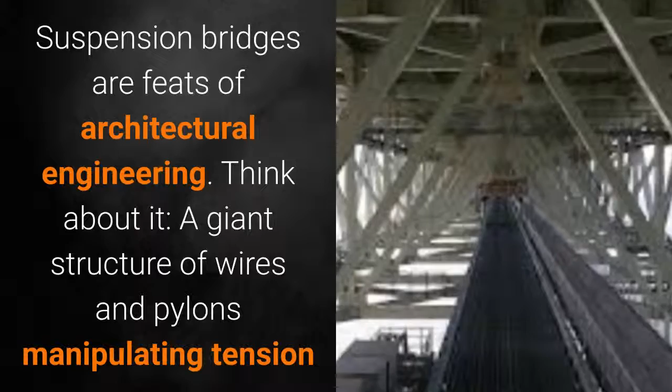Suspension bridges are feats of architectural engineering. Think about it, a giant structure of wires and pylons manipulating tension and compression to allow for a single span of heavy material to be suspended in air, thus letting it bridge wide chasms and bodies of water.

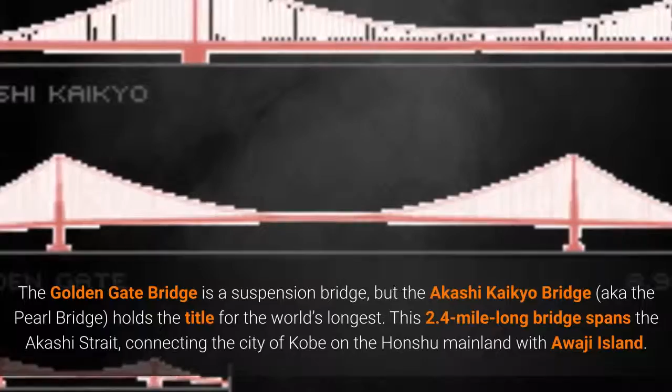The Golden Gate Bridge is a suspension bridge, but the Akashi Kaikyo Bridge, aka the Pearl Bridge, holds the title for the world's longest. This 2.4-mile-long bridge spans the Akashi Strait, connecting the city of Kobe on the Honshu mainland with Awaji Island. Since 1998, the bridge has carried 6 lanes of traffic and approximately 23,000 cars a day between the two towns. The impressive central span ranks as the longest in the world at 1.24 miles long, and the bridge itself is built to withstand a magnitude 8.5 earthquake.

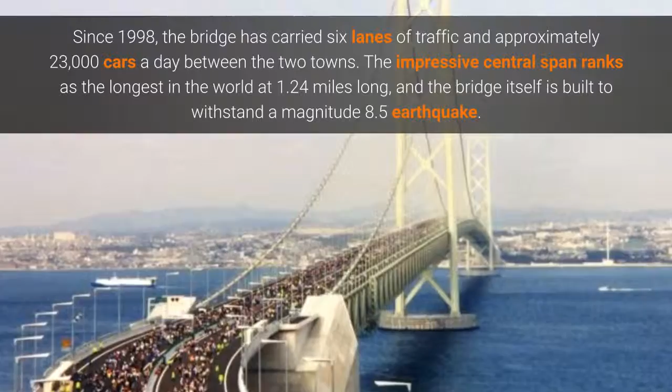In fact, during construction, the 1995 Kobe earthquake actually forced the two central towers further apart, making the center span 3 feet longer than it was originally designed.

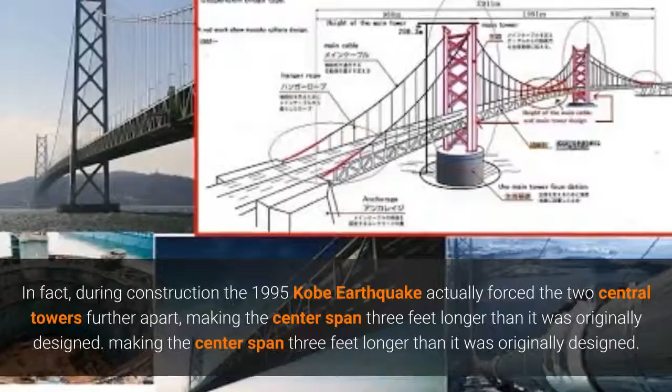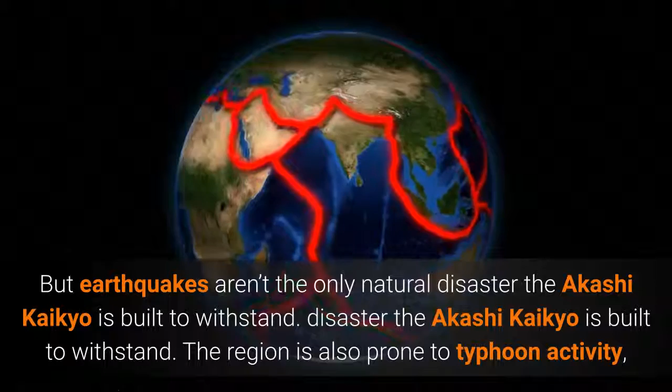But earthquakes aren't the only natural disaster the Akashi Kaikyo is built to withstand. The region is also prone to typhoon activity, so designers also built it to withstand 180 mph winds too.

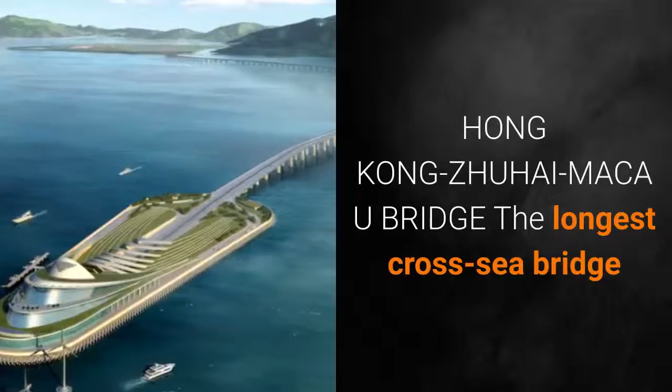Hong Kong-Zhuhai-Macau Bridge, the longest cross-sea bridge. China long ago cemented itself as one of the leading countries when it comes to bridge building, and the Hong Kong-Zhuhai-Macau Bridge only further cements the country's reputation.

At 34 miles in length, it is the longest cross-sea bridge in the world, twice as long as the country's Jiaozhou Bay Bridge, the former longest bridge in the world.

The Hong Kong-Zhuhai-Macau Bridge has completely changed transportation between the cities. The former inland route between Hong Kong and Macau is a 4-hour trek. On the bridge, travel time may be as little as 30 minutes.

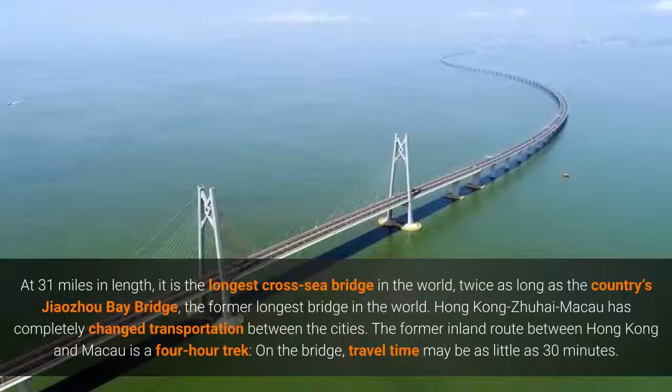Chinese officials hope that the bridge spurs economic development in southern China, one of the country's poorest areas. At the same time, it strengthens Hong Kong's position as the economic heart of the region.

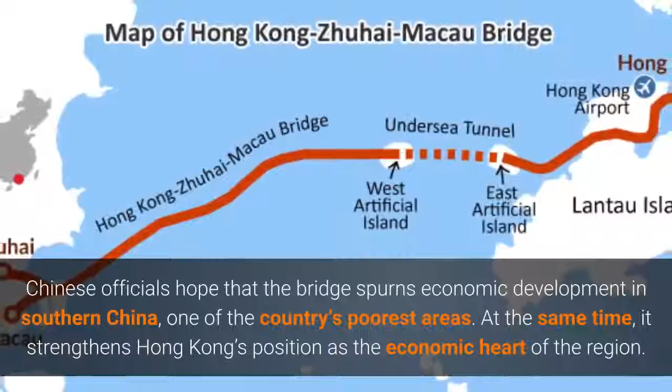While the bridge is the longest cross-sea bridge, it actually consists of 2 sections and 3 artificial islands. Connecting the 2 sections is a 1.7-mile tunnel closer to the Hong Kong side, which gives enough space for large shipping vessels to pass through.

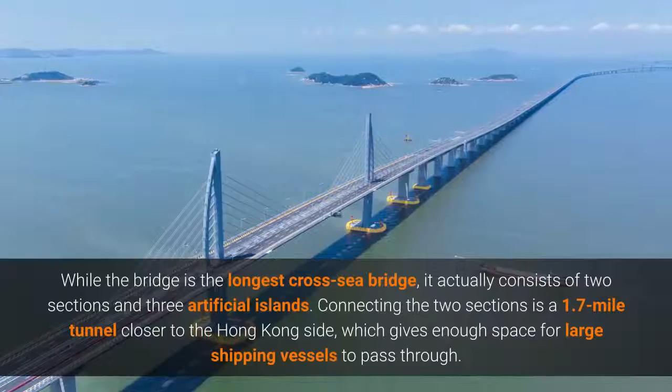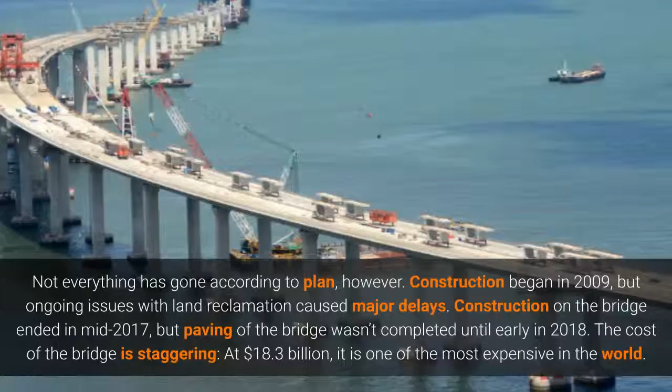Not everything has gone according to plan, however. Construction began in 2009, but ongoing issues with land reclamation caused major delays. Construction on the bridge ended in mid-2017, but paving of the bridge wasn't completed until early in 2018. The cost of the bridge is staggering, at $18.3 billion, it is one of the most expensive in the world.

Lake Pontchartrain Causeway, the longest continuous bridge over water. The Hong Kong-Zhuhai-Macau Bridge currently has the longest bridge span of any of the bridges on our list in the world in aggregate at 30.1 miles, but the longest continuous span over water is the Lake Pontchartrain Causeway in Louisiana.

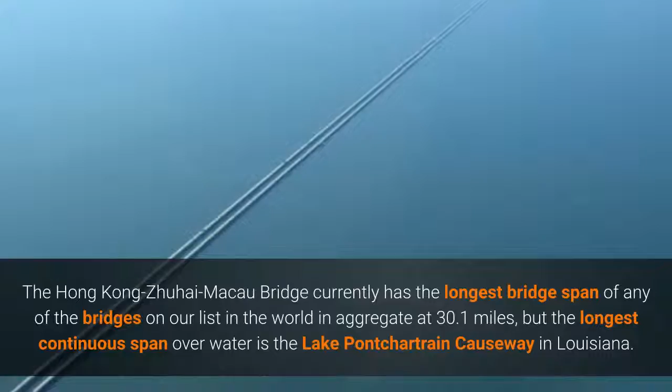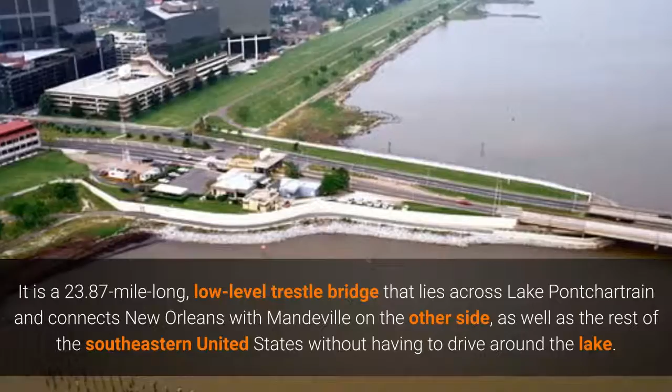It is a 23.87-mile-long, low-level trestle bridge that lies across Lake Pontchartrain and connects New Orleans with Mandeville on the other side, as well as the rest of the southeastern United States without having to drive around the lake.

Following the completion of construction, communities on the north shore of Lake Pontchartrain saw financial benefits as they were now included in the New Orleans metropolitan area. Drive times were reduced by nearly an hour. With a speed limit of 65 mph, you can be across the bridge in about 20 minutes or so.

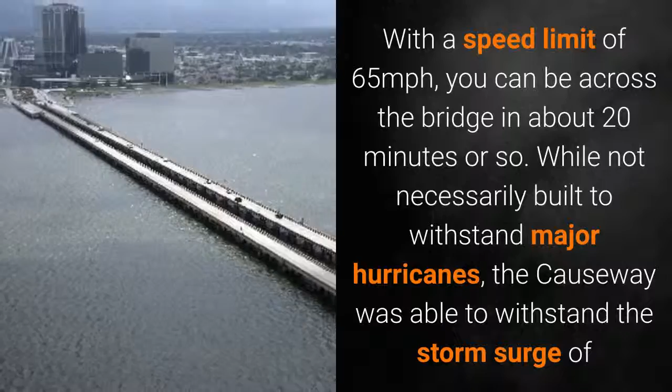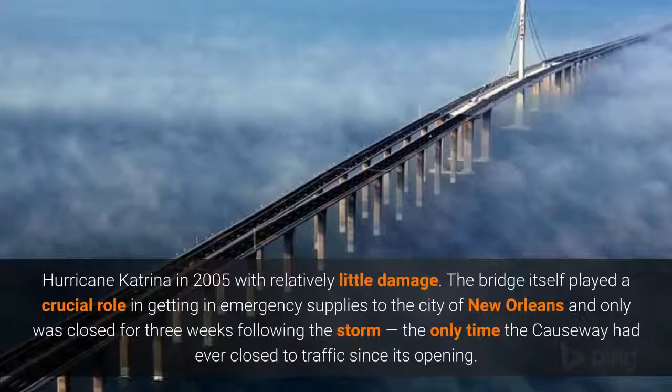While not necessarily built to withstand major hurricanes, the causeway was able to withstand the storm surge of Hurricane Katrina in 2005 with relatively little damage. The bridge itself played a crucial role in getting emergency supplies to the city of New Orleans and was only closed for 3 weeks following the storm, the only time the causeway had ever closed to traffic since its opening.

MILLAU Viaduct, the tallest bridge. We've given a lot of attention to bridges with impressive lengths, but that isn't the only measure that makes a bridge noteworthy. The tallest bridge in the world, meaning the height of the structure's tallest point, is the MILLAU Viaduct.

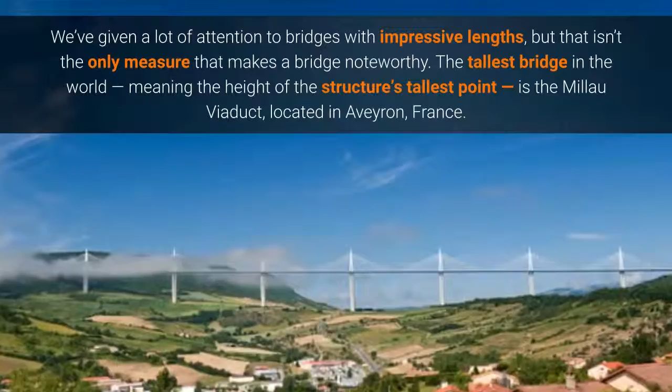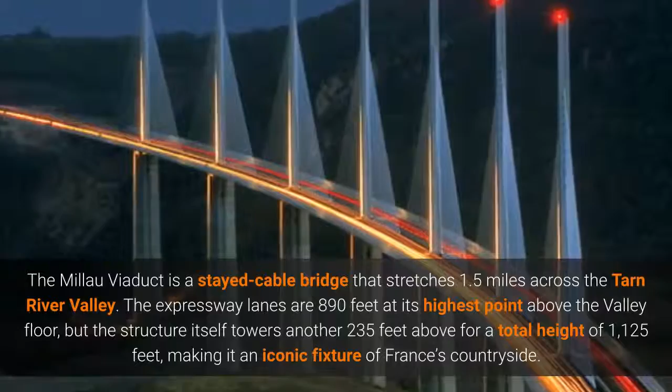Located in Aveyron, France, the MILLAU Viaduct is a stayed cable bridge that stretches 1.5 miles across the Tarn River Valley. The expressway lanes are 890 feet at its highest point above the valley floor, but the structure itself towers another 235 feet above, for a total height of 1,125 feet, making it an iconic fixture of France's countryside.

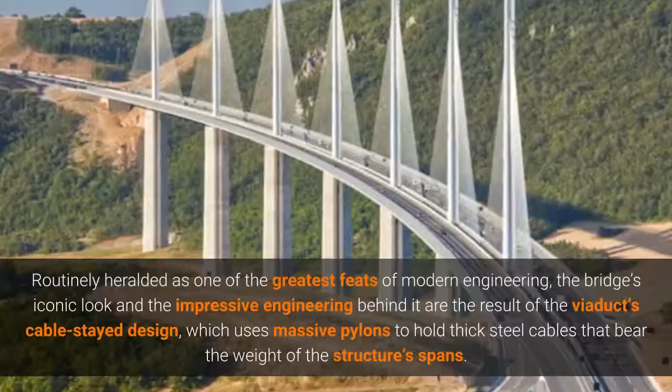Routinely heralded as one of the greatest feats of modern engineering, the bridge's iconic look and impressive engineering are the result of its cable-stayed design, which uses massive pylons to hold thick steel cables that bear the weight of the structure's spans.

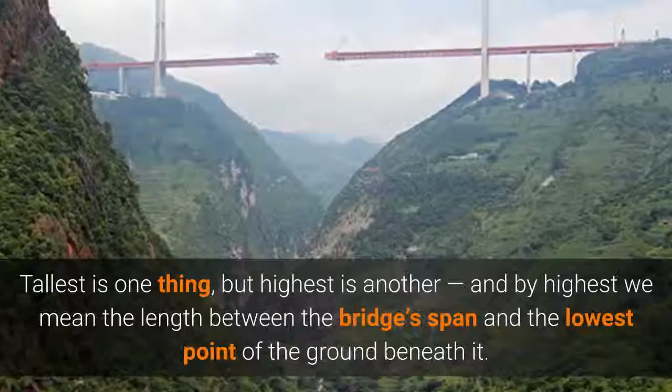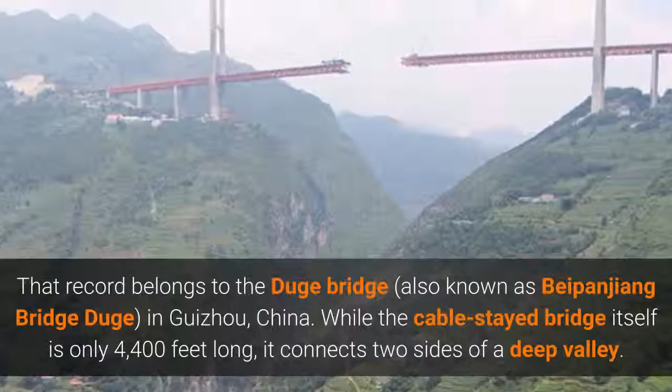DUGE Bridge, the highest bridge. Tallest is one thing, but highest is another, and by highest we mean the length between the bridge's span and the lowest point of the ground beneath it. That record belongs to the DUGE Bridge, also known as Beipanjiang Bridge DUGE, in Guizhou, China. While the cable-stayed bridge itself is only 4,400 feet long, it connects two sides of a deep valley.

The span floats a daunting 1,854 feet above ground at the deepest point, and could fit New York City's One World Trade Center underneath it with another 80 feet or so to spare.

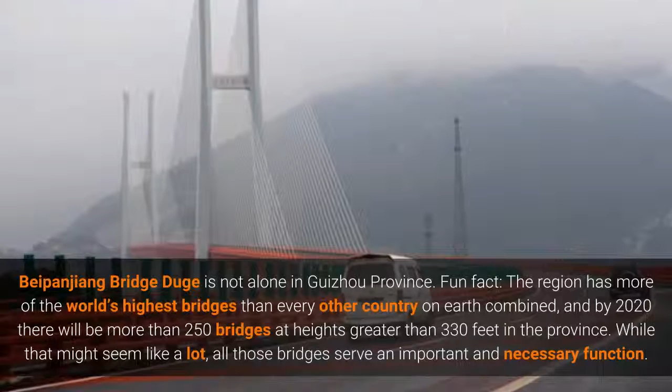Beipanjiang Bridge DUGE is not alone in Guizhou province. Fun fact: the region has more of the world's highest bridges than every other country on Earth combined, and by 2020 there will be more than 250 bridges at heights greater than 330 feet in the province.

While that might seem like a lot, all those bridges serve an important and necessary function. Before serious bridge construction began, traveling through Guizhou's mountainous and ravine-filled countryside was difficult, with most transportation taking place on small, two-lane roads. Other notable bridges.

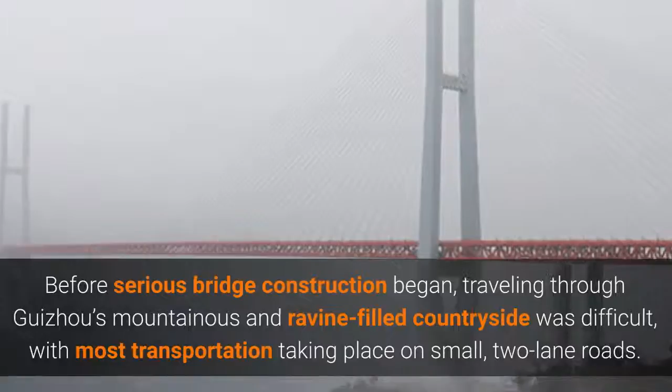India's living root bridges. In the Indian state of Meghalaya, in the northeastern part of the country, there is a remarkable practice of training fig trees to grow into bridges. The caretakers slowly but surely manipulate the tree roots as they grow, pushing them along and weaving them into walkways and river crossings. The process can take up to 15 years.

But once complete, the bridges are usable for between 500 and 600 years. As the trees grow, the bridges become sturdier thanks to the strengthening and thickening of the roots. They also have the particularly useful attribute of being self-renewing, especially given they don't require the same sort of upkeep as man-made structures. Plus, they just look cool.

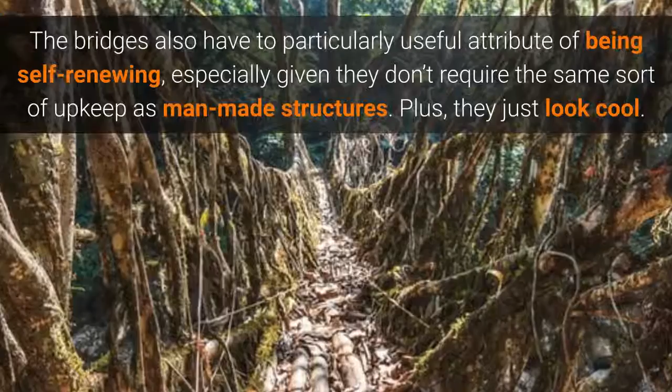Lucky Knot Bridge. Another cool pedestrian bridge comes from China-based Next Architects. These designers got their inspiration from the Mobius ring, which is essentially a ring that twists, and knotting, a form of Chinese folk art that utilizes knots to create decorative shapes.

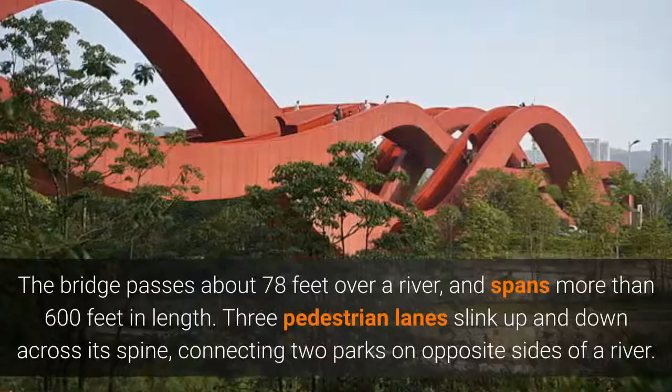The bridge passes about 78 feet over a river, and spans more than 600 feet in length. Three pedestrian lanes slink up and down across its spine, connecting two parks on opposite sides of a river.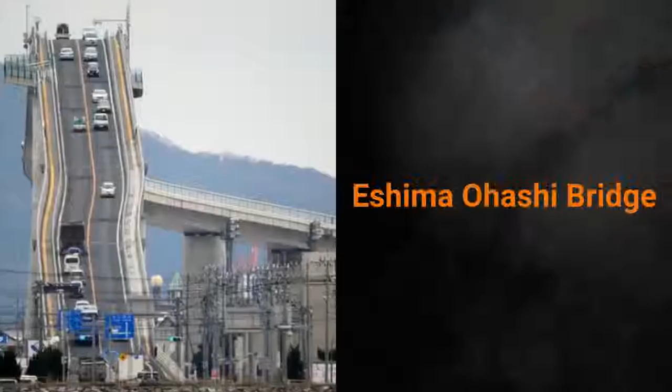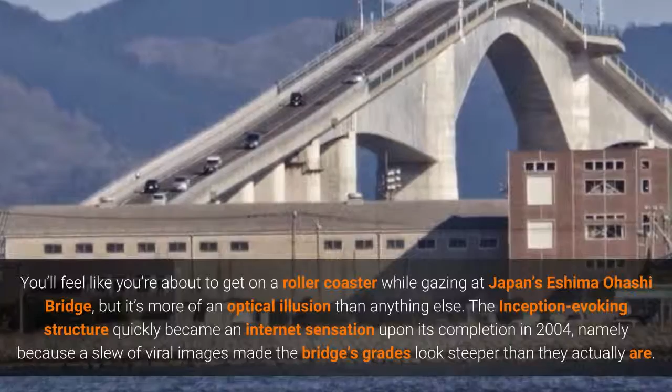Eshima Ohashi Bridge. You'll feel like you're about to get on a roller coaster while gazing at Japan's Eshima Ohashi Bridge, but it's more of an optical illusion than anything else. The inception-evoking structure quickly became an internet sensation upon its completion in 2004, namely because a slew of viral images made the bridge's grades look steeper than they actually are.

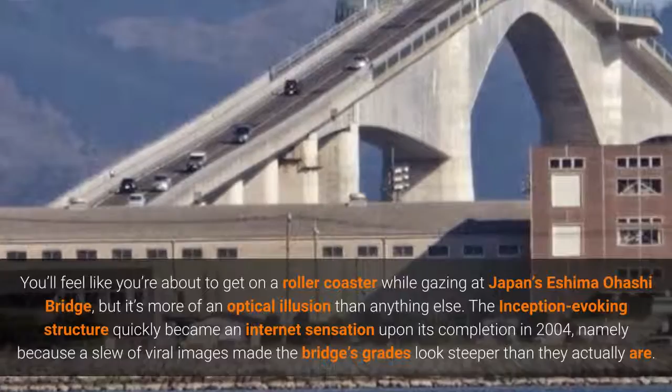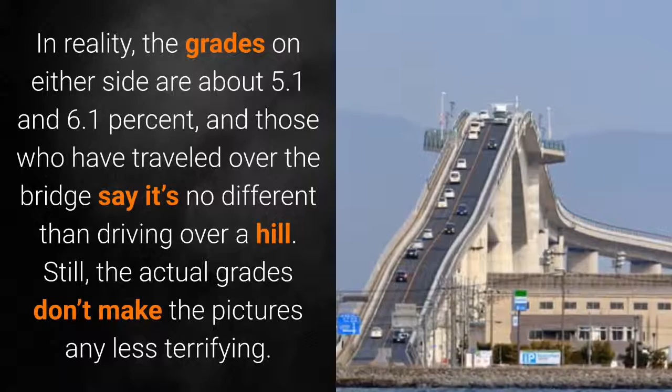In reality, the grades on either side are about 5.1 and 6.1%, and those who have traveled over the bridge say it's no different than driving over a hill. Still, the actual grades don't make the pictures any less terrifying.